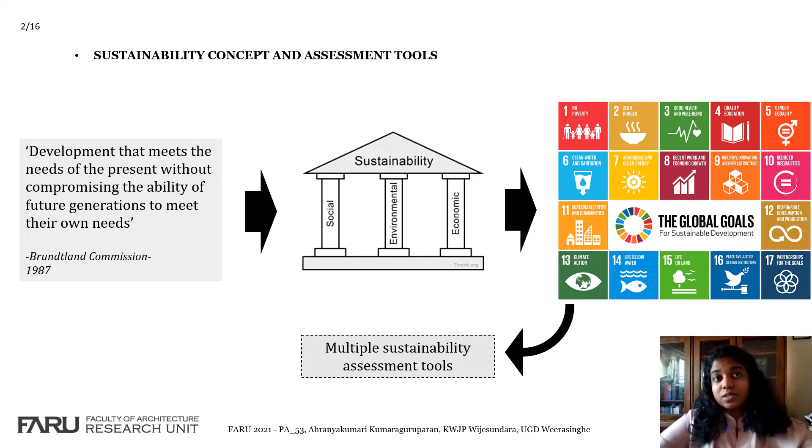In that sense, the assessment tool, which is a prototype that gives you a rating or score for anyone to understand the status, is defined as the assessment tool.

Physical safety and comfort is the physical ease and protection sensed by the user, as we are focusing on the user perspective, when components of design that ensure safety and comfort are established appropriate to the location with ergonomic standards.

I am adapting this definition by Ahmed-Kristensen and Stavrakos from 2012. Basically, it's about the physical composition made by the elements based on their location and dimensions, etc., to ensure safety and comfort.

This would enable people to automatically follow regulations. So we have those two concepts, and the basic argument of this review is: why should physical safety and comfort be combined with the sustainability concept and be a criteria of the assessment tool?

Though it is ideal to incorporate these guidelines with street design regulations or gazetted rules, the pragmatic approach would be to include them as elements of sustainability, which is at present a well-established quality assessment criteria and, most importantly, considered a trending design status.

So we have rules and regulations for several concepts, but there is always a lacking in enforcement, and we do not follow all of the rules. We somehow manage to get through, even in Sri Lanka.

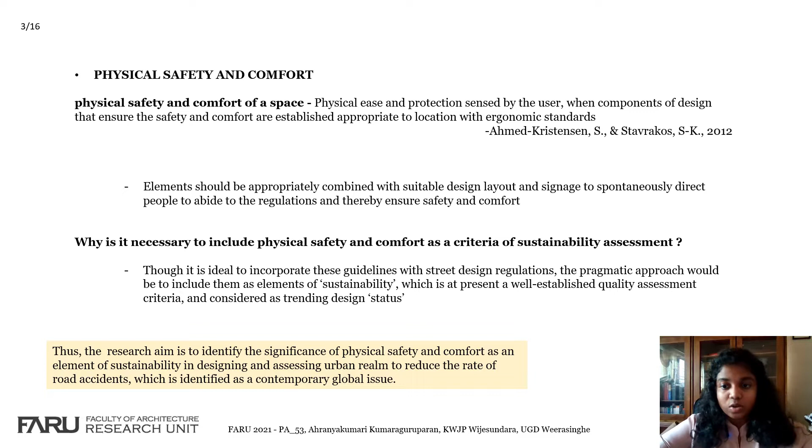The methodology followed is: in order to understand the severity of road accidents, it was based on global reports and other Sri Lankan statistics and police reports.

The literature review provides a summary of global definitions of sustainability assessment tools and the significance of including physical safety and comfort in sustainability assessment with regard to designing streets and reducing accidents, and to identify the knowledge gap as well.

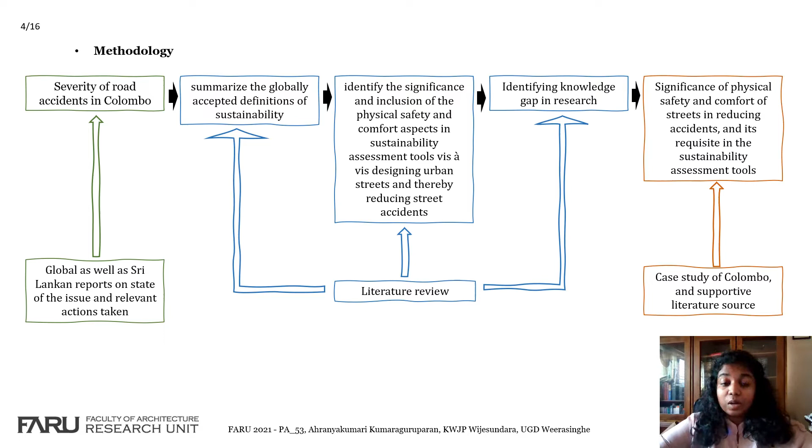Finally, the case study and understanding of the existing situation of Colombo is used to identify the significance of physical safety and comfort in streets in reducing accidents, and its requisite role in the assessment tool.

The literature is basically limited to the Scopus database and was analyzed using VOSviewer software, and most of the data about sustainability tools or accident rates are based on data available online, considering the COVID-19 travel restrictions.

Urban population growth and urbanization is an inevitable process we are going through. That process, along with inefficient planning, unsafe infrastructure, and lack of law enforcement as described by the United Nations, results in urban congestion and traffic accidents, which causes discomfort and safety threats to users, ultimately resulting in inefficient development, which completely contrasts with the sustainability concept.

In order to establish efficient development, the space should be very comfortable and safe, which would reduce congestion and should be achieved by reducing congestion and traffic accidents.

In order to gain that, urban population and urbanization should be managed through efficient planning, safe infrastructure, and proper enforcement of law. Enforcement of law is a challenge we've been facing for a long time.

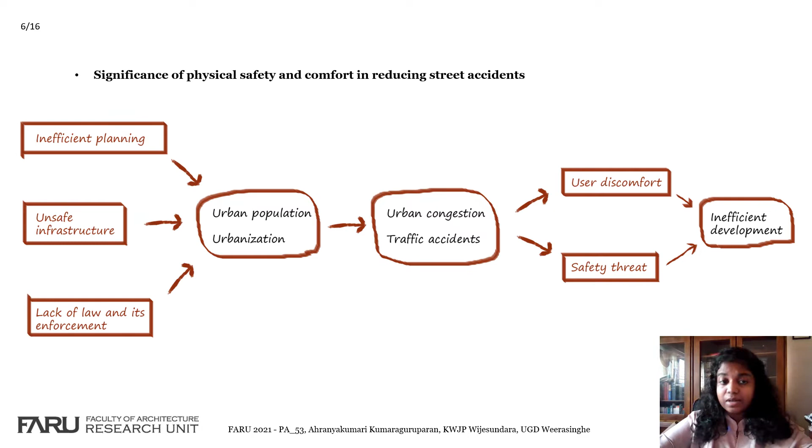In urban space, it is the streets that play a major role, occupying 80% of the space and accessed by the public almost every day in routine. As we consider the streets, traffic crashes are a major global issue, where every 23 seconds there's someone dying.

The United Nations report states that speeding, driving under psychoactive substances, unsafe infrastructure, and inadequate law enforcement are the major problems. The solution they give is basically to design roads to spontaneously protect users from traffic crashes.

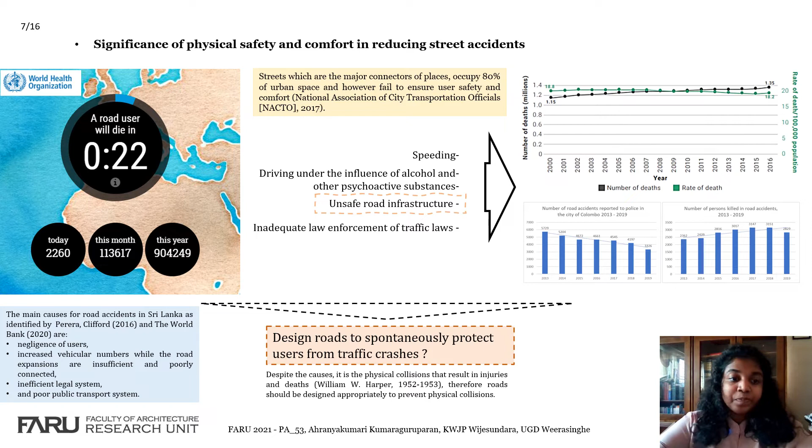In order to achieve that, which is an efficient method to be tested, what needs to be looked into is the infrastructure. What is infrastructure? It is the physical composition. So now as we understand the importance of physical safety and comfort, we need to look into how much it is addressed in the international concept of sustainability.

Looking at the United Nations, which is the internationally influential organization's 17 goals, out of 17 it is only goals 3, 9, and 11 that address somehow a few concepts related to physical safety and comfort, where target 3.6 is directly to halve the number of global deaths and injuries from road accidents, which is the issue we discussed before.

Goal 9.1 addresses infrastructure development and sustainability, but it is more narrowed down to industrial innovation and infrastructure, and does not address the public realm.

Target 11.2 is to improve road safety, notably by expanding public transport. The argument of this review is that this is not enough—even if we have public transport, if it does not address the issues related to physical safety and comfort, that would be an inefficient development.

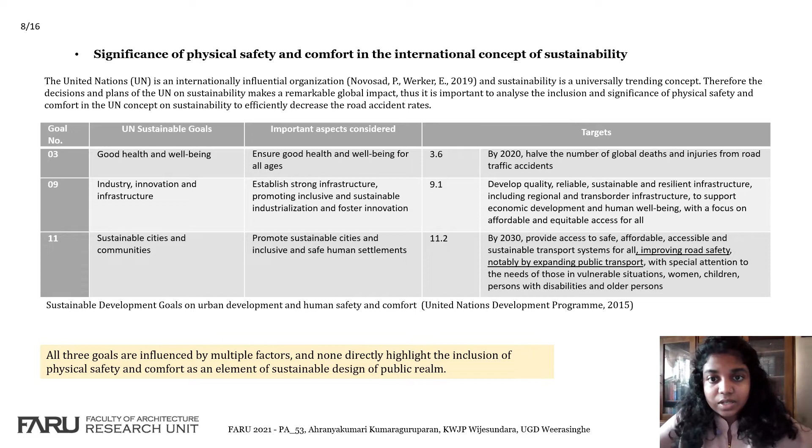So in order to achieve sustainability, at least one of the targets should be to ensure the achievement of physical safety and comfort.

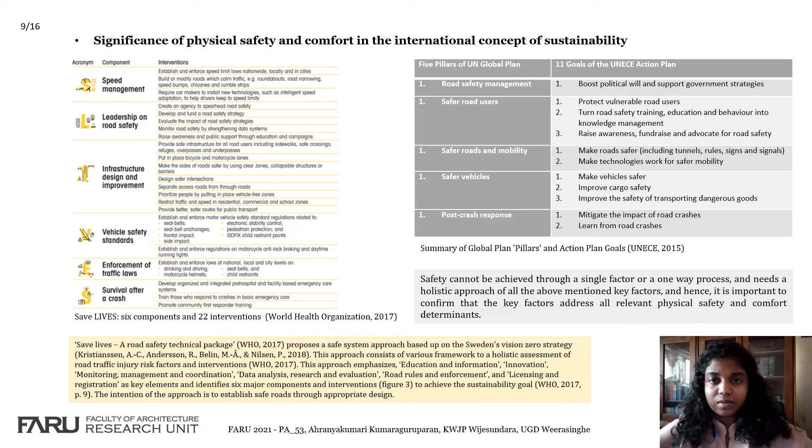Looking at other concepts such as defined by the World Health Organization's Save Lives package, or the summary of global plan pillars and action plan goals by the UNECE, none of those address the necessity of physical safety and comfort or its physical composition. This is a major problem identified in the international concepts being followed.

In the literature analysis of filtered journals, there were about 16 journals filtered through VOSviewer software. This clearly shows that no priority is given to physical safety and comfort, except for thermal comfort—but not the physical composition, the actual tangible elements.

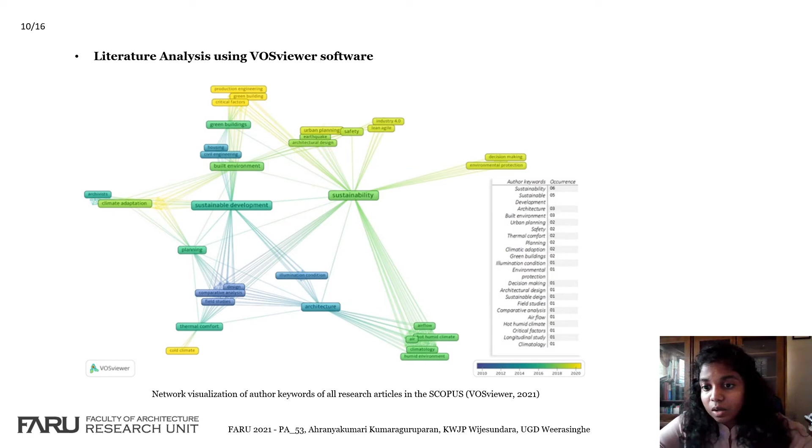These latest research papers address a few aspects about safety, urban planning, sustainability, architectural design, etc., but they are based more on perspectives rather than the ergonomics of physical safety and physical aspects.

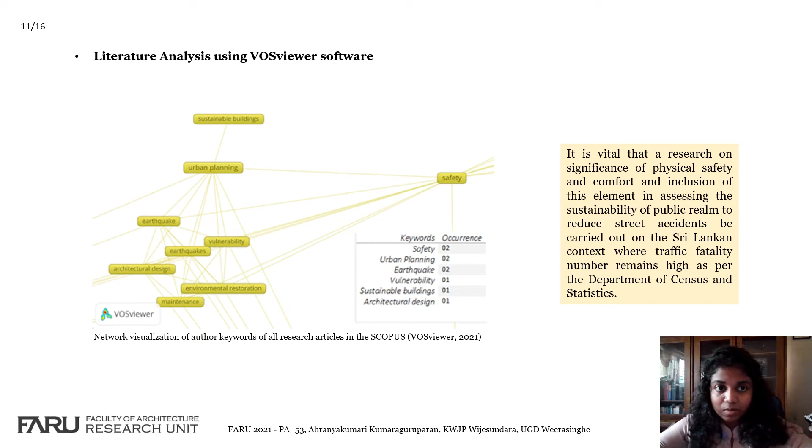Looking into sustainability assessment tools that are available, there are four main assessment tools that were identified that address sustainability aspects. However, it is only the iRAP model that addresses the issue of road safety.

The problem with iRAP is that it is basically specialized to achieve Goals 3 and 4, but it is more specific to the European context.

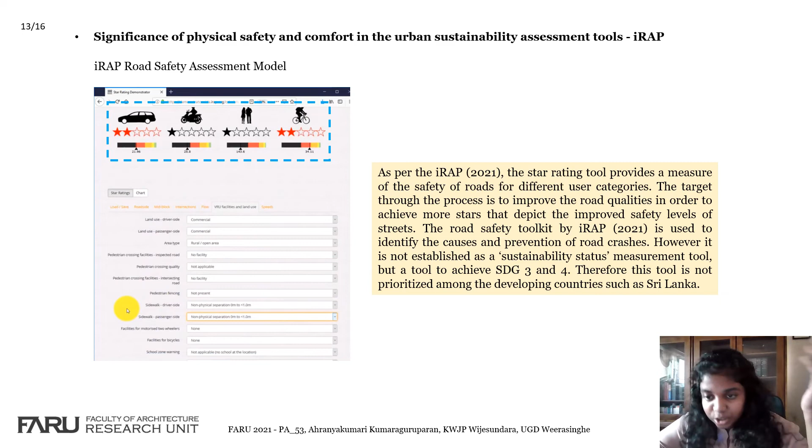So finally there's an answer to a question giving a rating of the physical safety and comfort. However, it is not in detail, very broad in context, and it is suitable only to the European context and not to Asian contexts—therefore not applicable to Sri Lanka or Colombo.

Therefore there is a necessity to have a model similar to iRAP, because as we broadly look into a summary of the assessment of streets of Colombo, we could see from reports and statistics that the traffic fatality rate has been increasing, and the number of injuries still remains high.

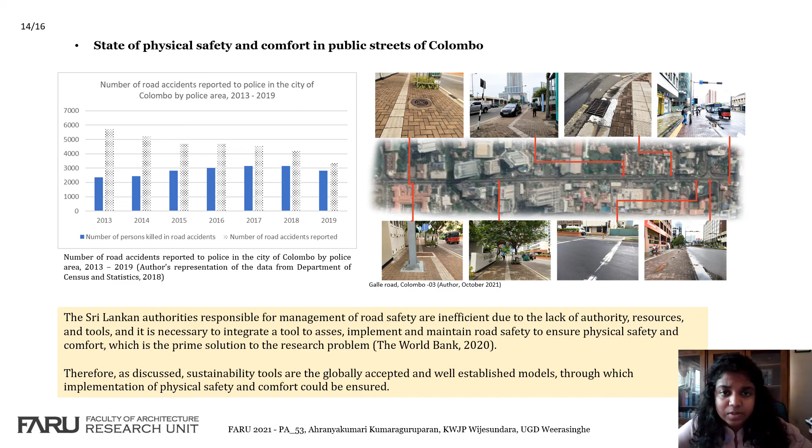As a conclusion of this review, I've identified the problem, the indicators, the results, and what target is achieved out of each of the assessment tools that were assessed.

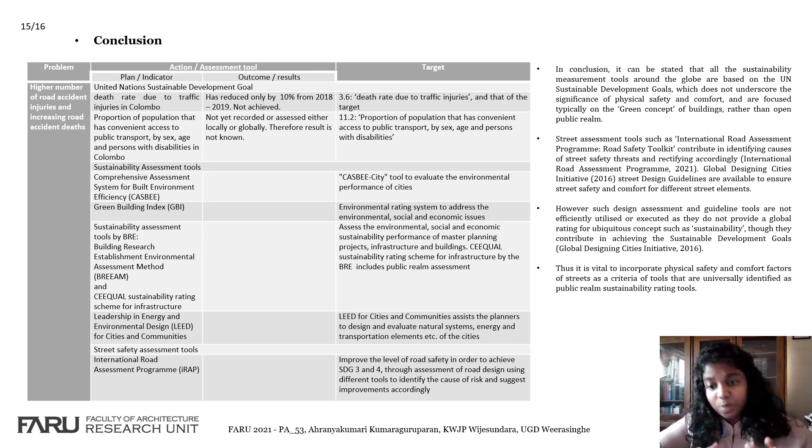Among them, only iRAP has addressed the issue, but it is very specific to Europe. Therefore it is concluded that all the tools identified as sustainability assessment tools, as we analyze, none address physical safety and comfort.

But where the iRAP model does address the target 3 and 4, it is not identified as a sustainability assessment tool as such. Another problem is that it is very specific to Europe.

Considering Sri Lanka, other researchers have stated that we lack a tool to assess sustainability or construction, or any guidelines specific to developing, designing, or constructing the streets. So even the iRAP model does not address that.

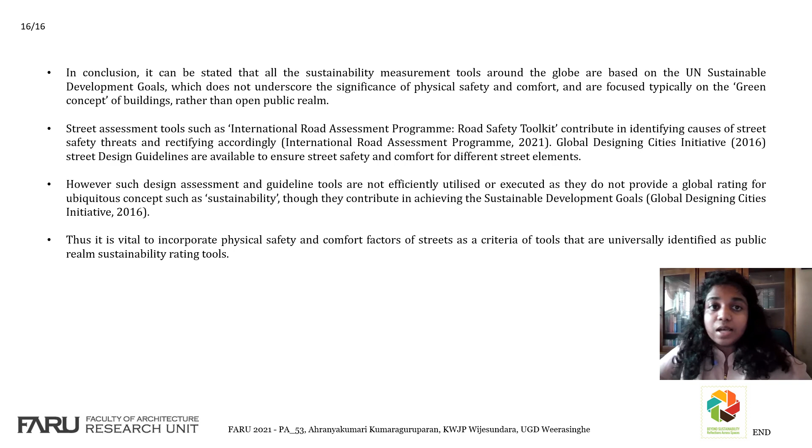Ultimately, the conclusion is that physical safety and comfort establishment should be a part of the direct sustainability concept and its targets, and there should be an application well established as a sustainability assessment tool that is globally aware, especially to developing countries such as Sri Lanka, in order to efficiently establish physical safety and comfort to reduce traffic crashes and thereby injuries and deaths. Thank you.